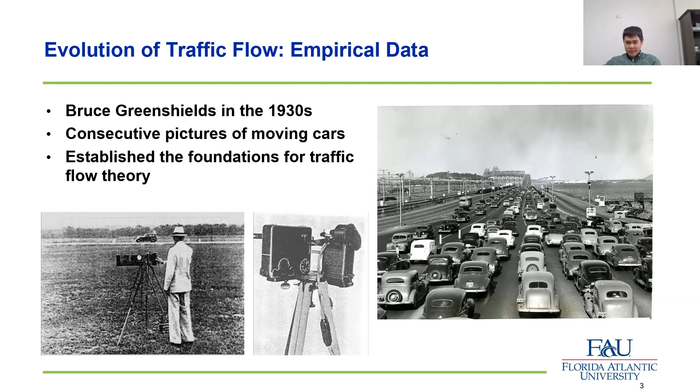By having a better understanding of traffic, we also got to a point that we had different control strategies. A lot of innovations in traffic control, starting as early as back in the 1960s. Yes, we have variable speed limit in Seattle, but that's not the first one. The first one was actually right around Detroit. Same thing for ramp metering, right? California is not the first one to have ramp metering. This was a new concept, to Chicago, back when they started this whole thing in the 1960s.

And we've been doing this fine tuning, and we've been perfecting our ways of understanding traffic, collecting data, building models, and proposing control strategies, really for the past 100 years almost. And car technologies were the fundamental player in traffic flow. Hasn't really changed as much as you may think.

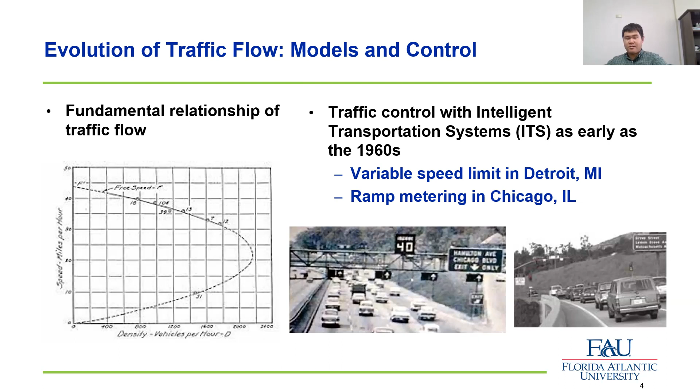Yes, cars were not as powerful back in those days, but think about how cars were built in the early days. If you're fortunate enough, like me, to have driven a car from the 1990s, cars were a lot lighter. So we're basically compensating for an increase in powertrain technologies, an increase in power in the internal combustion engine, by adding more weight. So in terms of acceleration characteristics, we're not seeing a whole lot of major differences until we get to a very new era when we have electric powertrains, a completely different characteristic compared to traditionally the internal combustion engine that we had in pretty much the past 100 years.

So here, I don't want to bore you with mechanical engineering concepts and knowledge, but here's an overview of the big differences. Before I go into the figures and the equations, and how power is delivered, how that's related to torque, think of internal combustion engine power delivery versus electric vehicle power delivery as the difference between parking your car under the tree on a hot summer day, especially here in Florida, versus parking your car under the sun, completely exposed without trees or shades. So if you turn on your air conditioning when you get back into the car, if you parked under the tree, especially here in South Florida, the cooling effect is going to come on pretty soon, pretty immediately, versus if you had your car completely exposed in the sun, parking outside without any shades.

In my experience, it takes about half an hour for you to feel the cooling effect. It is misery for the first half an hour.

So that's the difference between how power is being delivered. With an internal combustion engine, power delivery is very gradual and very sluggish at the beginning because there's less air coming into the engine when the engine speed is pretty low. So you produce not as much torque, and the product of torque and engine speed is power. Power remains very weak until you have high enough engine speed, up to the maximum engine speed where you actually get peak power. But because the engine has to spin faster if you want the wheels to spin faster in the same gear, to achieve a higher speed...

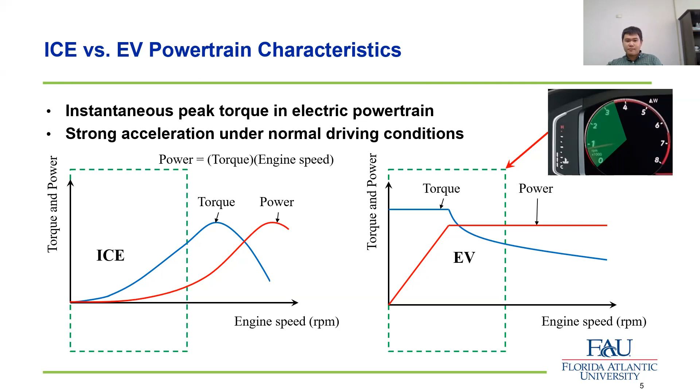But the big concern is how we're going to charge those cars, right? And that's been preventing wider adoption of electric cars.

So we started our conversations in the electric car world with those earlier models like the Nissan Leaf, the Kia Soul, the Volkswagen e-Golf, if you remember those cars, that had less than 100 miles of range and took hours to charge. The very first EV, back when I was a graduate student, you couldn't really charge that very quickly. It requires an overnight charge, and if you're lucky, you might be able to go 50 miles.

Today is very different. In fact, for most of the electric cars you can buy, the mainstream ones, it doesn't have to be a luxury car—you're expecting close to 300 miles of range, and some of the good ones will deliver closer to 400 miles of range.

Back in the day, we used to only have wall chargers, the plug you use to charge your laptop or cell phone. Those were very, very slow, only delivering somewhere around 1 kilowatt of energy. For today's electric car, that could take several days, approximately 60 hours, to charge it full.

But the popularity of level 2 chargers really enabled faster charging. So if you want to get the expected range, all it takes is an all-day charge or overnight charge when you're at home, and an all-day charge when you're at work. In fact, at my university I have level 2 charging, so it's just a matter of parking the vehicle at a charger during the day while you're in the office, and you can get a pretty good amount of range. This is typical mileage of an average American driver for a week, around 300 miles.

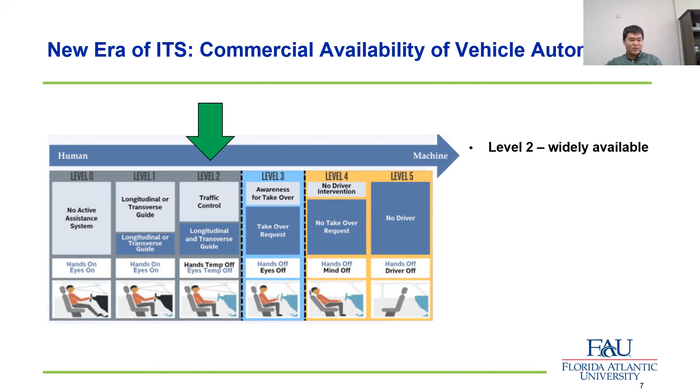The other big elephant in the room is that we're starting to see automation and driver assistance paired with newer technologies. For those of you in this webinar series, I don't need to give too much description. You know that we currently have vehicles that are level 2 capable, using ADAS with ACC, adaptive cruise control, and lane keeping.

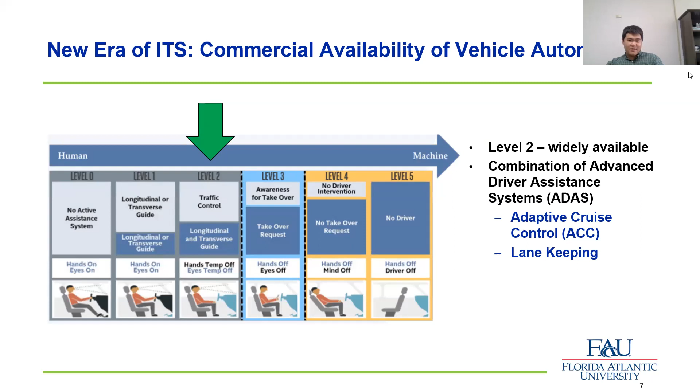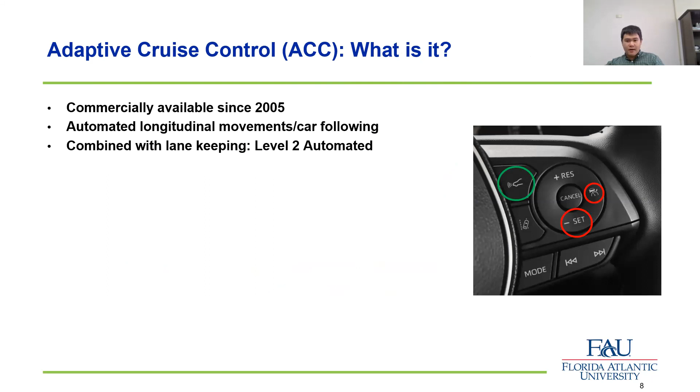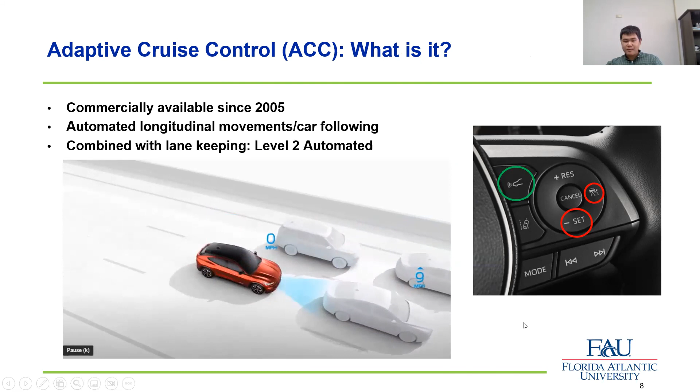So given all of that, how attainable are these technologies? It's quite attainable, more common than you think. So automation, to some degree - not full self-driving, not level 3, 4, or 5, but driver assistance via level 2 - is pretty much available across the board.

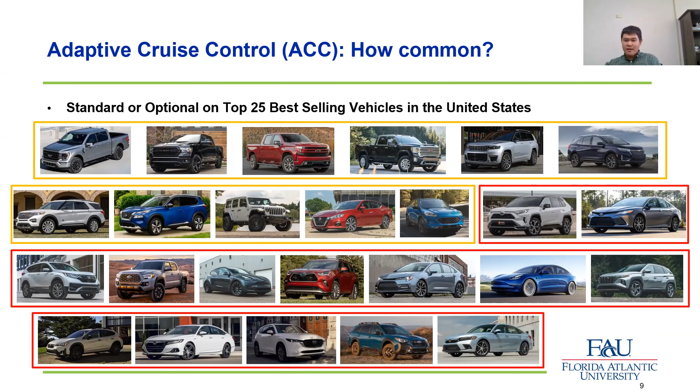There's a lot of positives about electrification, especially looking at the future with more driver assistance and automation. But the takeaway is that it's not so positive when you don't have the best hardware, which is the internal combustion engine. Some of you have talked with me about this back at TRB, but I'm going to give you some details on my recent efforts and field experiments.

So going forward, given all these changes - electrification and driver assistance automation - what does that really mean for us as transportation researchers and traffic engineers? Well, we need empirical data. Without conducting experiments, without observing how these new technologies behave, there's really no way for us to build models. Modeling is ongoing work; empirical data collection has been completed, and hopefully we'll be able to answer questions going forward with traffic management and traffic control.

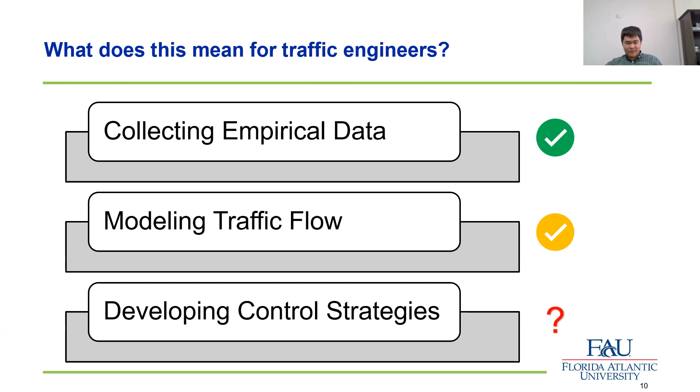This is a 3-step process undertaken by earlier researchers over the last 100 years: data collection efforts back in the 1930s, development of the fundamental diagram, followed by innovations in traffic control strategies like variable speed limits, ramp metering, and managed lanes.

In terms of data collection, we have to rethink the way of doing things. We have to reinvent the wheel in how we gather data and understand traffic, because we simply do not have the luxury to collect data macroscopically anymore, using helicopters for aerial photographs or mounting cameras on highways to collect video data. Why? Because the technology is not mature enough to have high enough market penetration.

Cars last longer these days, and it takes a while for the fleet to update itself. If we take the reactive approach done in the past by transportation researchers and traffic engineers, we've got to wait a few more decades to see a traffic stream with high enough market penetration of ACC and ACC with electric vehicles.

A more proactive way of thinking is designing controlled experiments and collecting trajectory data to fully capture all possible traffic conditions using modern technologies such as GPS and OBD data from onboard computers, to construct things like time-space diagrams and understand vehicle trajectory behavior at a microscopic level, rather than looking at macroscopic metrics such as flow and density across several lanes.

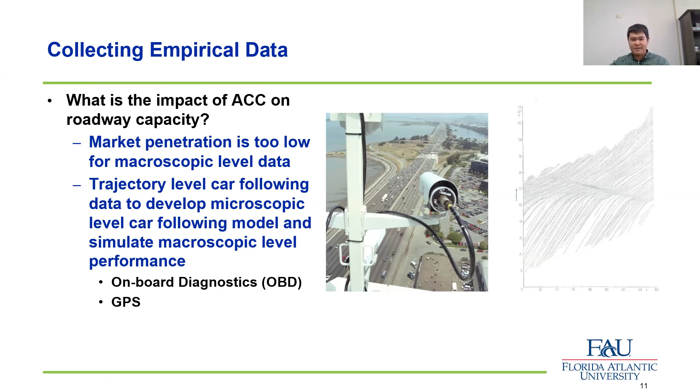Fortunately, there's been a lot of effort on data collection for ACC, and here's a summary of the different kinds of data being collected. It shows a lot of concentration of data at higher speed ranges with small speed disturbances, focused mainly on the concept of string stability from a vehicle dynamics control perspective.

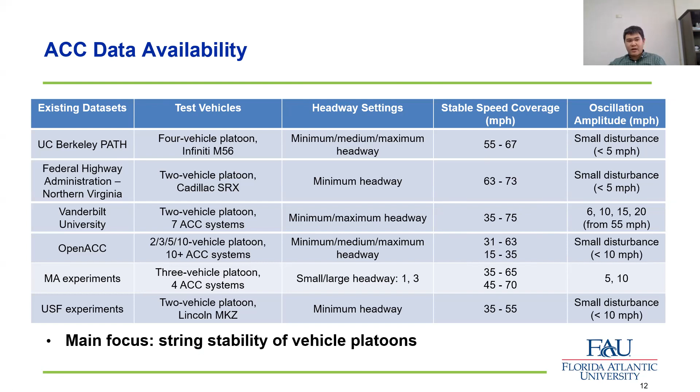Until I performed my experiments recently, there had yet to be an extensive dataset of trajectory data to model car following and integrate into microscopic traffic simulation. So my intent is to fill in that gap.

So I bought 3 vehicles and got rid of them in the fall of 2022. They actually appreciated in value over time, thanks to inflation and the crazy car market we're in.

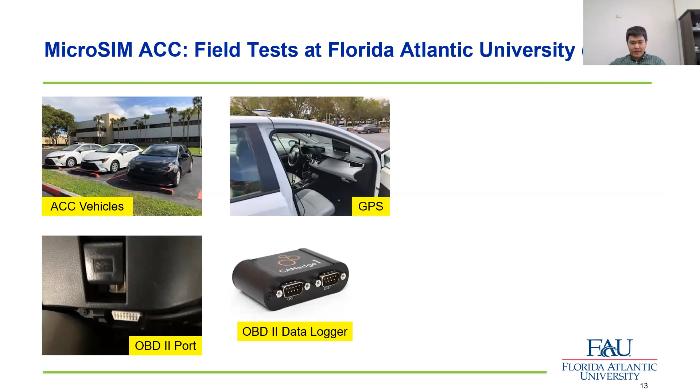I installed GPS units and deployed OBD data loggers. Here's a picture of how we get data from the OBD - there's a port, just like how you diagnose engine problems. We installed different kinds of GPS units.

In the older days, we had lower resolution GPS that were much more expensive and cumbersome, but GPS technology has improved a lot. Now you can spend a couple hundred dollars, use Bluetooth on your phone, and collect data at 25 hertz.

Over the course of about 2.5 years, I logged a little over 20,000 miles on internal combustion vehicles with ACC. You'll see the fun stuff with electric vehicles shortly, but let me first show you the flaws of internal combustion vehicles, especially when paired with driver assistance technology such as ACC.

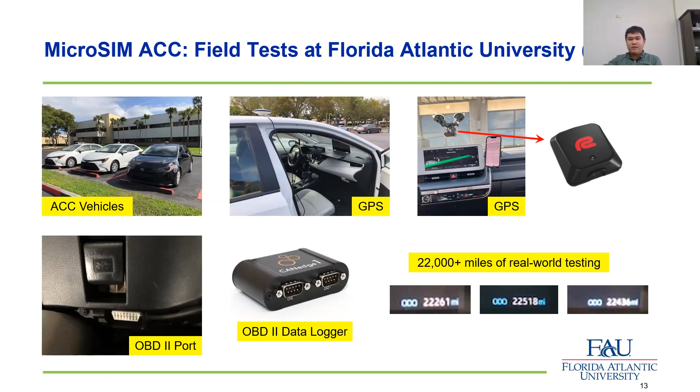This dataset will be available once our papers are accepted and published. It's called MicroSim ACC, meant for microscopic simulation. We have a lot of trajectory data covering various ranges of speed fluctuations, like this example of free flow speed at 60 miles per hour with different extents of speed fluctuations, with lots of repetitions. The big dataset will hopefully be available soon for the rest of the research community - be on the lookout, I'll make announcements as we progress.

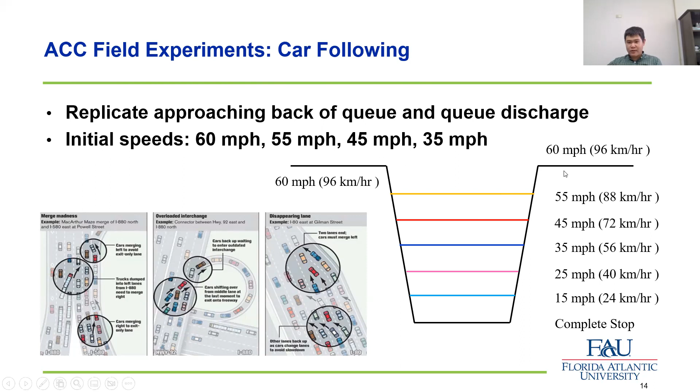This simulates free flow conditions followed by approaching the back of a queue in crazy bottlenecks, with lots of weaving, complicated off-ramps, or many lanes merging together. At the end of the day, we have queue discharge in a controlled experiment, simulated by returning to free flow speed. We selected very empty public roads, mostly in the Florida Everglades area.

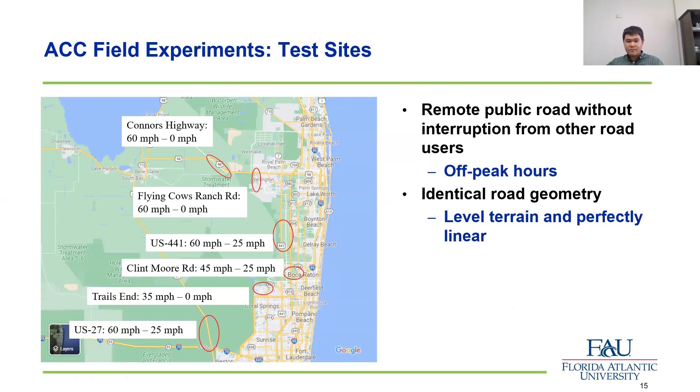We conduct the field tests during off-peak periods on level terrain, where the road geometry is also perfectly linear. Quite easy to find here in the state of Florida.

Just to give you a few examples of the videos, you can see from a glance that the ACC system doesn't really adopt very long or very short headways. You would expect some degree of driver assistance and automation would reduce headways and improve capacity, but not so much.

But here's what happens when you have some kind of speed fluctuation from a disturbance that we simulated in the real world. You can see the problem is that during queue discharge that we try to simulate, the acceleration from the internal combustion vehicle is quite sluggish at the beginning. You could attribute that to reaction time of the controller, but maybe not so much.

The headway and spacing actually increase at the same exact speed compared to before. Of course, if you set your desired speed high enough to make the following vehicle exceed the leading vehicle speed as much as possible before reducing the speed again, you will be able to catch up, but that catch up process will take quite a lot of time.

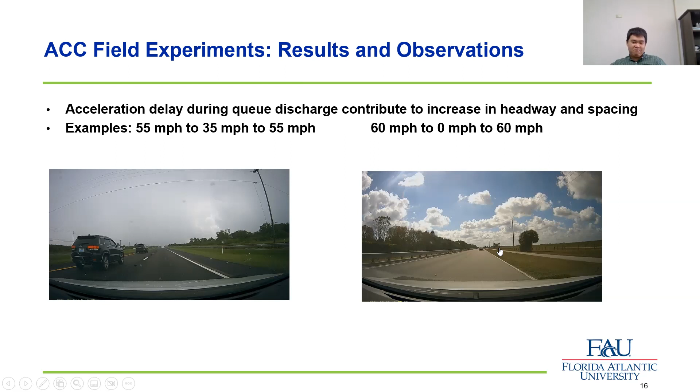This is reminiscent of some of the human driver behavior as well, but ACC kind of amplifies that, as ACC tends to be a lot of times more conservative than human drivers.

Looking at the time-space diagram here, you'll realize that you can see pretty obvious changes in headway and spacing. So we plotted the cumulative distance traveled here. You can see the vertical difference is also becoming larger, followed by your speed versus time plot, as well as acceleration versus time plot.

You can tell that at the beginning of the queue discharge process, the blue line doesn't really achieve a constant slope right away. There's that gradual increase, right? And that's paired up with the results from the acceleration plot. Acceleration is very sluggish before the engine builds up more power to achieve constant acceleration.

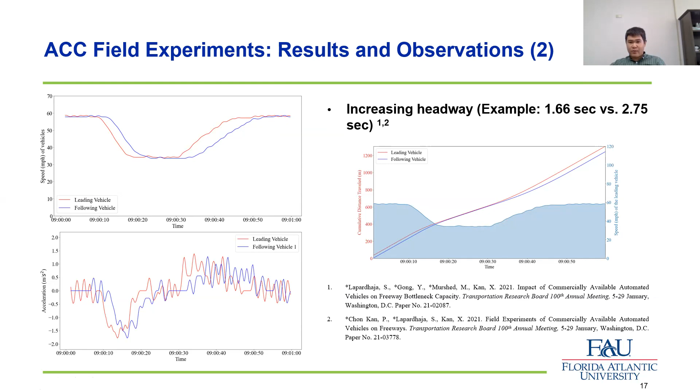So knowing the difference in powertrain technologies, we would expect electric vehicles to behave much more differently and keep a relatively constant headway.

So we actually went out and tested various different electric vehicles we can find on the market, especially the rental car market.

The Kia Niro was one of the first ones we tested back in 2022, the summer of 2022. There's a little bit of a story behind that.

One of my colleagues, Rafael Cern, who was also in the audience when he was visiting me back in late 2021, ran into some rental car crises at the airport as he landed, and he had to choose between that and a couple of luxuries like Maserati and Lincolns, and he decided to turn down the luxuries and went with the forward-thinking approach to get an electric car.

That's what really got me thinking about everything related to electric cars and their powertrain advantages, after I decided to do a little field experiment with him while he had the rental car.

Funny enough, when I went to California to do these field tests and rent an electric car, I was given the same exact car with the same color as the one that he just rented.

So moving forward, I tested a slightly newer version of the Hyundai Kia Group product, the Ioniq 5. That's the most up-to-date EV architecture, followed by a European luxury brand, Polestar. It's basically a Volvo with a different badge, but that's also electric.

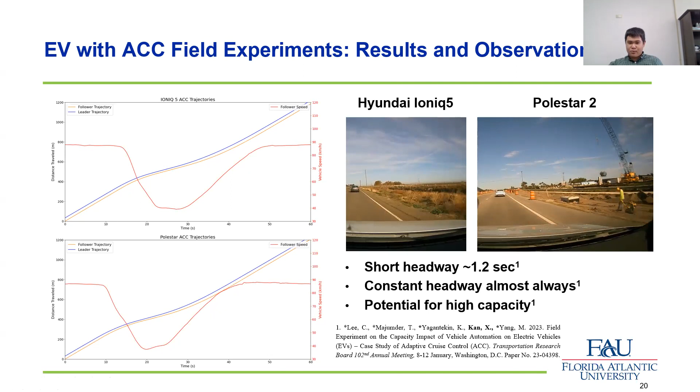But you gotta not forget Tesla, right? When you talk about electric vehicles, you really have to think about Tesla. But unfortunately, for those Tesla fans out there, the software tuning doesn't really take advantage of the EV powertrain characteristics. So we decided to single out Tesla as a non-traditional manufacturer, and we did some experiments with that. This will look very deja vu to you because it just looks like the internal combustion engine car-following behavior under ACC mode - very similar to the Toyota Corollas and Toyota Camrys that we tested.

So here's the congested speed we simulated, and watch what happens during queue discharge. They don't call it ACC, they actually call it autopilot. And this is very similar to an internal combustion engine.

Does it have the potential to perform like the Hyundais and Kias we tested, like the Polestar? Yes. I mean, this is theoretically a much better car in terms of power to weight ratio. It's actually much lighter, 3,600 pounds instead of 4,500 pounds, while delivering the same power. But for reasons that I either don't know or don't want to get into, this non-traditional, also the most popular electric car brand at the time, does not perform the way that we actually expect.

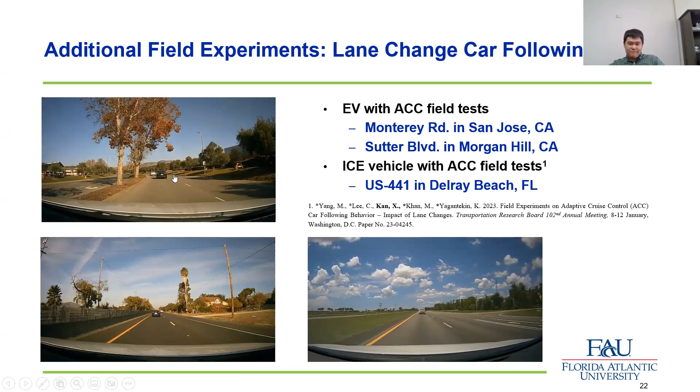So what do we do out of the data, right? So what about modeling? So the next step, knowing that we have all the empirical data, modeling has to take place a little bit differently. You cannot have a macroscopic model as easily, given the fact that there's lack of macroscopic data, but rather we want to model at trajectory level, at the microscopic level, so that we can adopt the microscopic level in simulation.

My goal here is to integrate that into commercially available simulation software. With simulation, we can actually see the long-term impacts with different kinds of hypothetical scenarios when the market penetration increases. So despite the fact that we have a low market penetration right now, carefully planning trajectory data collection and developing models to integrate into simulation can really help us in the long run.

The model framework for ACC is kind of based on the constant headway principle of ACC control design. And to do that, what we have here is the gap regulation. This is part of an earlier effort with PATH, and also part of an earlier effort in data collection that was rather limited to higher speed ranges with limited acceleration and deceleration ranges. And that's where those parameters were generated from.

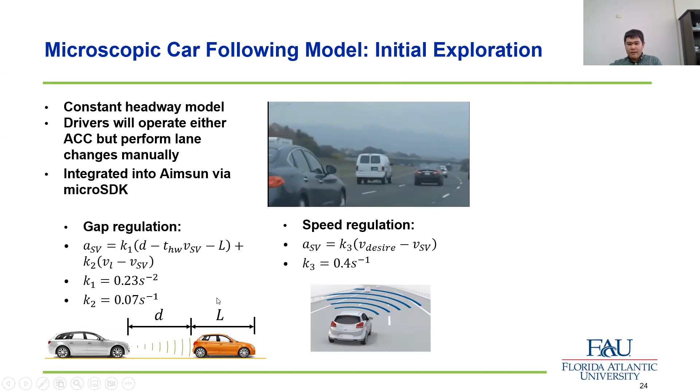Of course, we apply speed regulation if the surrounding vehicles are very far away. So we just adjust for the current subject vehicle speed and desired speed of the current vehicle. For the most part, in congested traffic, the gap regulation will be what matters.

But the problem is that, part of the reason why I went ahead and undertook all that very cumbersome data collection and collecting a lot more data is because using the earlier data with very limited speed ranges and very limited acceleration, what happens is that this constant headway logic, it doesn't really work in car following model of behavior, modeling car following behavior. For at least the internal combustion engine, I'll get to the EVs in just a bit.

The constant headway model doesn't really hold for the internal combustion engine. But for EVs, it may be true. This is currently ongoing work that I won't talk about in too much detail, but stay tuned for later conferences.

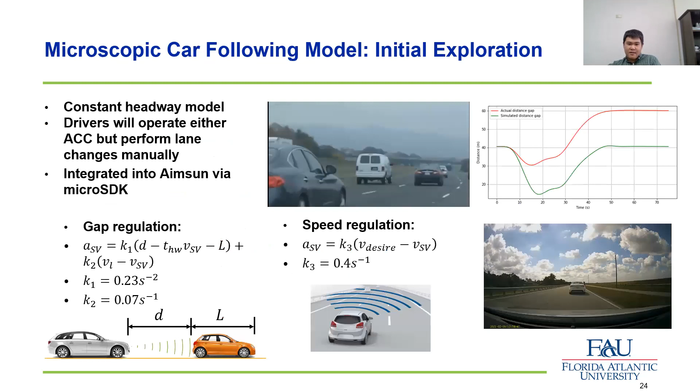But for the EV, I think there's a lot more flexibility. We can apply a model that's not piecewise, just a single equation assuming constant headway, like right here, because EVs really maintain constant headways.

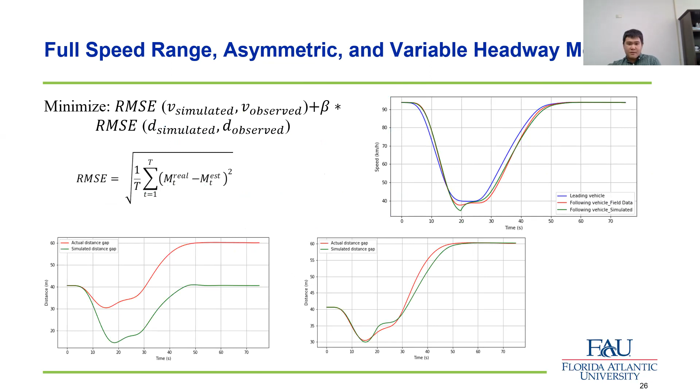I'm going to skip over some of those optimization and calibration processes. When it's all said and done - again this is not the EVs yet, but for the internal combustion engine - of course we expect a decrease in capacity, increase in delay, and lower average speeds for all of these analyses using a real world corridor.

We actually did one, so just a comparison of the two extremes: 100% ACC versus 100% human driver on the State Route 99 corridor in Sacramento, California, where we had a lot of good benchmark data to calibrate a benchmark scenario for human driver behavior.

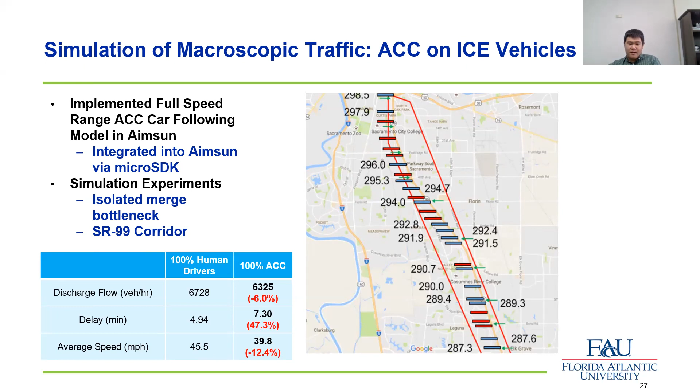We actually integrated into AIMSUN via the micro SDK, or micro software development kit, that allows us to override the models within the proprietary algorithm of the simulation software.

Going forward, we would expect that we could apply a simple and constant headway model for EVs with ACC, and hopefully that'll help us answer questions about traffic safety, operations, even geometric design. Does that left lane, the express lane approach, still really work for electric vehicles?

Do we need ramp metering in the future, given the powertrain advantages, given what you saw with the car following behavior? Do we need to think about improving those short ramps and short merges? Maybe not so much.

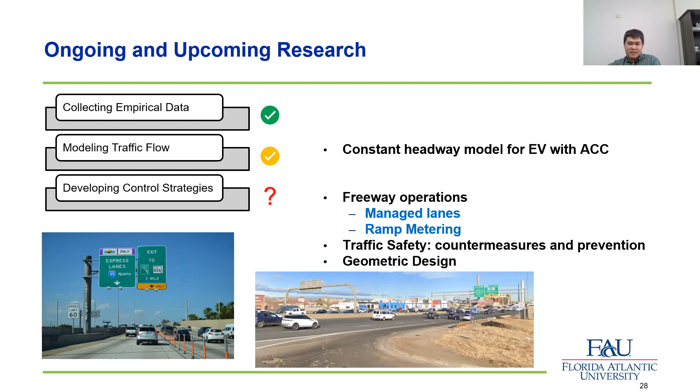With electric vehicles being able to accelerate so well, maybe it's not worth the infrastructure spending on such geometric constraints. And obviously, with more electrification and more automation, there's definitely more excitement coming with auto lane change.

And possibly level 3, level 4 automation, which we'll still have to take our time and carefully conduct experiments to understand the impact on traffic flow, to hopefully help traffic engineers and transportation researchers adapt to vehicle technologies and the potential opportunities as well as obstacles.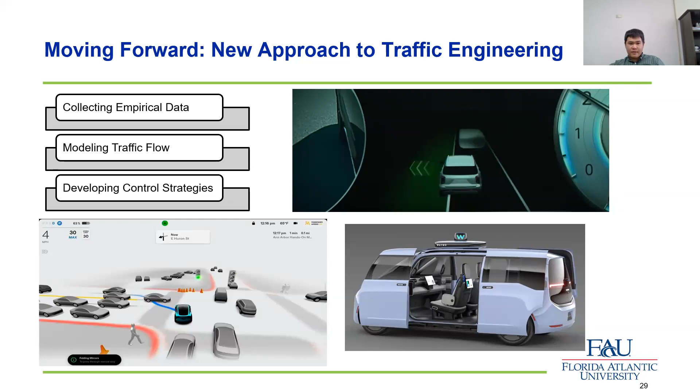So that's the end, and hopefully that gave you some surprises, a slightly different perspective, and I'd be happy to chat with you guys if you have any more questions.

Thank you, David, for the great presentation. I remember your commute is such a long way, which triggered you to actively work on traffic congestion.

By such experiments that you do, we now clearly see how commercial ACCs deteriorate traffic capacity and other performances, and also how electric automated vehicles can help resolve them - like by its nature, the strong acceleration and quick peak torque. It was also interesting that Tesla does not take some advantages as other EV powertrains do.

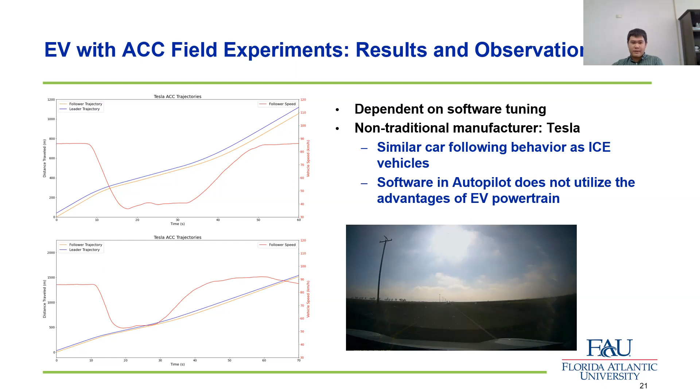I would definitely expect so. Some of the ongoing work I have not presented yet, but I'll be able to share it at the next TRB, for example. The analysis and modeling I've done so far is only completed for the internal combustion engine. I would expect a significantly different model for the EVs. Notice how I pointed out that there's a shorter headway to begin with, while the EVs actually maintain a very consistent headway — there's not much increase in headway when there is unstable traffic.

So when it's all said and done, I would expect definitely significantly higher capacity. What we observed with an internal combustion engine with ACC is a headway of about 1.6, 1.5 — that's the best it could do. And that headway cannot be sustained, which means the maximum flow or capacity cannot be sustained in the real world if you have enough of those vehicles. So I would expect quite a significant improvement — at least 50% higher in more ideal cases.

Thank you. I have one more additional question. For the capacity model, do you think it's possible that the future capacity model could be a function of the percentage of electric vehicles in the traffic flow stream, and the percentage of internal combustion engines?

Yeah, the whole purpose or long-term goal of this research is using microscopic level data to build a microscopic level model and develop simulation tools, so these microscopic level simulation tools can give us macroscopic estimates, which in turn could become part of the Highway Capacity Manual recommendations in the future.